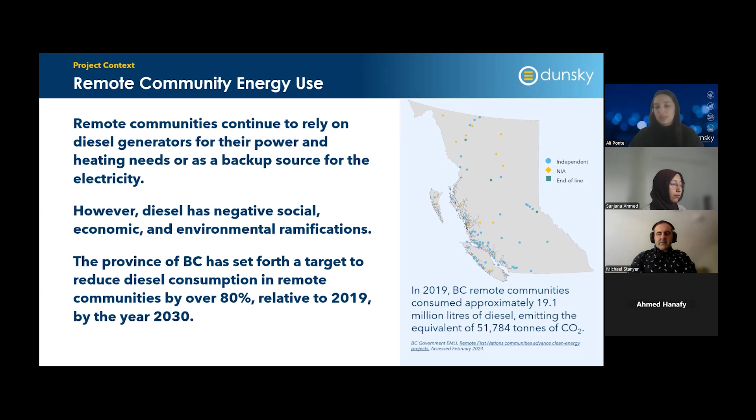Also, a loss of power in remote communities when projects fail in these settings often means that communities lose access to electricity, and consequences can become life-threatening, as many of these communities are isolated in remote environments and experience harsh weather conditions. So naturally, the province of BC has set forth a target to reduce diesel consumption in remote communities by over 80% relative to 2019 by the year 2030.

So renewables in remote communities, generating electricity from renewable sources, has been a key decarbonization pathway in remote communities historically and currently. However, in recent years, hydrogen has emerged as a tool that could contribute to the decarbonization of our global energy systems. Hydrogen is a fuel that can be reliable, scalable, and storable, which makes it attractive to complement the intermittency of renewable energy sources, as well as having potential in some of the harder to electrify sectors such as industry. However, to date, there's been limited exploration of hydrogen in remote communities specifically.

So today, for our scope of work, we'll be covering that this project focused on assessing the potential for hydrogen to serve in the role of a complementary solution to help transition remote communities away from diesel and contribute to more cost-effective emissions reductions.

The goal of our body of work was to summarize the diverse hydrogen production pathways, storage, and transport methods, as well as potential end uses within remote communities; identify a subset of enabling conditions that are required for establishing a hydrogen ecosystem in remote communities, as well as gauging the interest of some remote communities in establishing hydrogen systems; and lastly, examining the potential contribution and cost effectiveness of hydrogen in remote communities through 2 illustrative case studies.

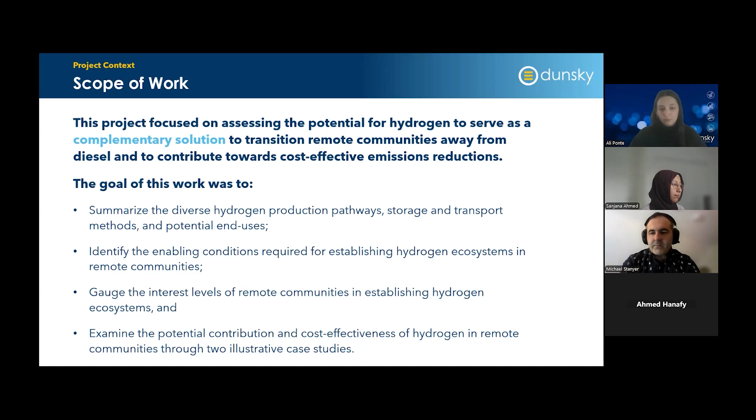So next we'll move on to just a brief hydrogen primer for those that are maybe a little less familiar with hydrogen fuel. So there are several opportunities and challenges associated with hydrogen and its potential role in decarbonizing rural communities. In terms of the opportunities and why we wanted to explore it, hydrogen is scalable. Electrolytic production of hydrogen is a scalable, clean process requiring only water and clean electricity. As renewable energy sources become cheaper and more accessible, the scalability of hydrogen produced from renewable electricity increases. That means hydrogen production can be adjusted to match the fluctuations in energy demand, making it adaptable to different community sizes and needs.

Hydrogen is also versatile. It's a clean fuel that offers optionality in its applications, making it potentially suitable for heating, power, and transportation. Hydrogen is also reliable. Similar to diesel, hydrogen is a physical fuel that can be stored in large quantities as a backup, making it a reliable option for remote communities, particularly those who face unstable power grids and energy supply challenges.

However, there are a number of challenges that are associated with hydrogen. First and foremost, it's nascent. Hydrogen energy systems lack the maturity and widespread adoption seen in more established technologies such as wind and solar. Hydrogen is expensive. The production, storage, and distribution of hydrogen, particularly electrolytic hydrogen, is more expensive than conventional energy sources and some renewable alternatives. Achieving cost parity with these sources will be critical for hydrogen to become a viable option in its widespread adoption. And lastly, infrastructure. Developing the necessary infrastructure requires substantial upfront investment and coordination, including electrolysis facilities, safe storage solutions, and a reliable distribution network.

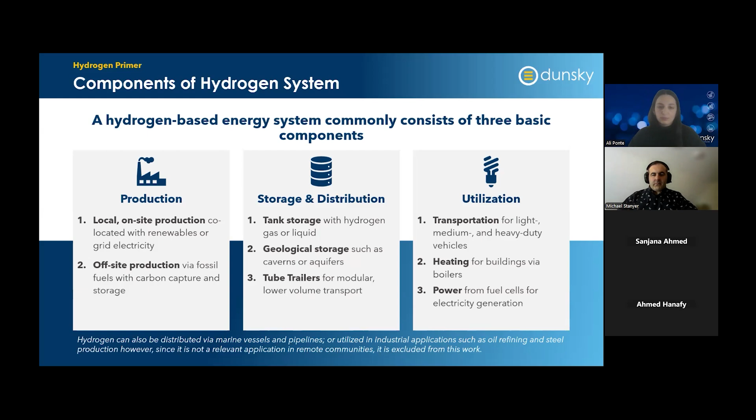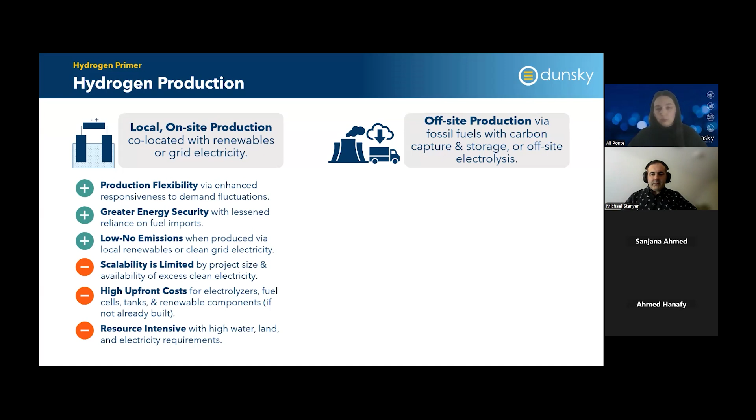So first and foremost, there are two categories of hydrogen production. The first one is on-site. In the context of remote communities, this refers to hydrogen produced via electrolysis, co-located with renewables. This method is highly suitable to remote communities, especially those with access to abundant renewables and limited accessibility, and by that, I mean limited road infrastructure to and from the communities. The decision on which source to use really depends on various factors, such as the availability of renewable energy and grid connectivity or other local conditions.

There are a few positives to local on-site production. There's flexibility, again, being able to respond to demand fluctuations. There is greater energy security, as you're producing the energy locally versus transporting it in from outside of the community, and so you're not as susceptible to supply chain disruptions. Assuming that it is produced from renewables, there's low to no emissions. Scalability is limited; that's one of the challenges with on-site production. So if you have an existing wind project, for example, the scalability of hydrogen produced from that project is limited to the size and availability of wind generation of that project. It's also resource intensive.

Electrolysis requires high water, land, and electricity requirements. Additionally, there are high upfront costs, especially if there is no existing renewable production within the community. There's a need for investment in electrolyzers, fuel cells, tanks, and other renewable components, again, if those don't exist on site. For off-site production, this could be through various pathways from fossil fuels with carbon capture or off-site electrolysis.

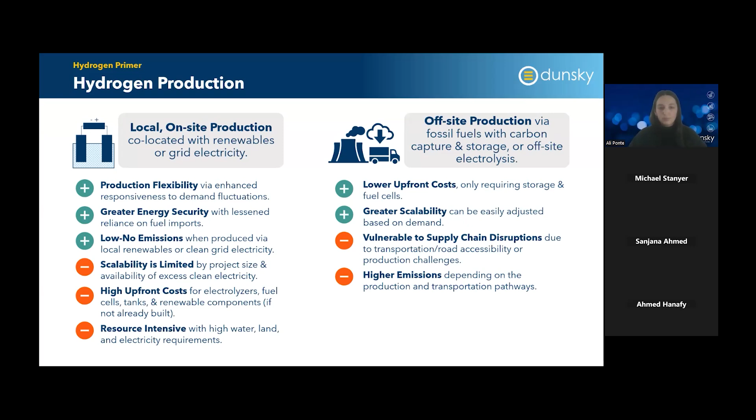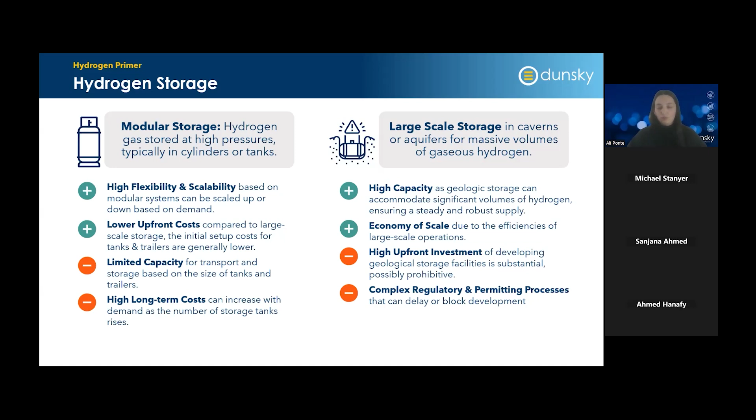For large-scale storage, that can be offered by the availability of geologic storage. So if there are nearby salt caverns, hard rock caverns, or aquifers, this is generally considered safe and economical for massive volumes of gaseous hydrogen. Again, if there is no geologic storage available on or near the community, then this is null. But this is associated with also complex regulatory and permitting processes and a really high upfront investment to develop that geological storage and make sure that it is safe and suitable. However, again, once you reach massive volumes of hydrogen, you can get higher economies of scale.

There are three key end uses for hydrogen: heating, transportation, and power. Heating using hydrogen boilers uses hydrogen gas as a fuel to produce heat for space and hot water applications, very similar to natural gas boilers. There are, however, many challenges with using hydrogen for heating. Firstly, you need a dedicated distribution network to distribute the gas to the boilers. Additionally, existing in-home piping is not suitable for hydrogen as it will leak and rust. And so there are high costs, not only with building out a distribution network, but the cost of retrofitting homes and developing the proper infrastructure that is compatible with hydrogen gas.

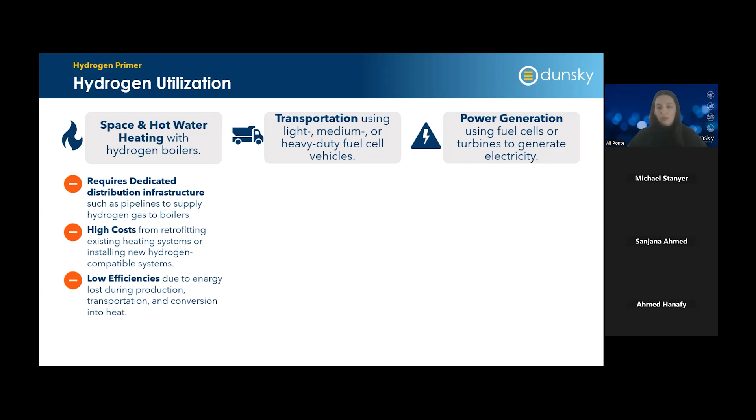While hydrogen boilers offer a low carbon alternative to natural gas boilers, the overall efficiency of hydrogen boilers is lower due to energy loss during production, transportation, and conversion into heat, making heat pumps the most viable option for the communities, as they're more efficient, more cost-effective, and more mature. For this reason, we actually believe that there is no real role for hydrogen in heating in domestic applications, and this is supported by various studies by other authors that examine the role of hydrogen in domestic applications.

Hydrogen can also be used as a fuel for light, medium, and heavy-duty vehicles in the form of fuel cell vehicles. Battery electric vehicles are currently viewed as the primary pathway to light and medium-duty vehicle decarbonization. However, in very small communities, like remote communities with limited grid, unmanaged EV charging can result in peak load growth and the need for large investments in additional grid infrastructure, which is unsustainable. And so fuel cell vehicles potentially could play a role by mitigating some of that unmanaged peak load and complementing the use of electric vehicles.

However, the costs of fuel cell vehicles are significantly higher due to the very high costs associated with vehicle production, fuel cell technology, hydrogen production, and distribution. Fuel cell vehicles also require dedicated refueling infrastructure, similar to traditional gas stations. However, traditional gas stations are not compatible.

For power generation, which is the third opportunity for end use, hydrogen can be used by fuel cells as a clean and efficient way to generate electricity, which makes them more ideal for various applications, including powering remote communities. There are hydrogen gas turbines. However, they're very large, less scalable, and currently limited to about 10% hydrogen to 90% natural gas. And while they are projected to have that ratio be higher, they are not proven for that yet, and so they're not technologically mature.

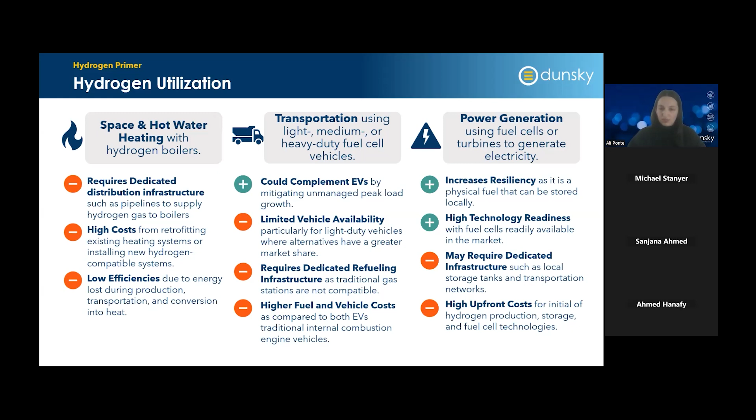Now we will move on to evaluating hydrogen feasibility. So we've developed a 3-step framework for assessing the feasibility of hydrogen within these communities. The first one is to assess the enabling conditions of the community. The second step is to define the hydrogen system. So once you have a better understanding of the characteristics that exist within a specific remote community, you can then look at the different hydrogen pathways and define what are the potential pathways for building out hydrogen and implementing it

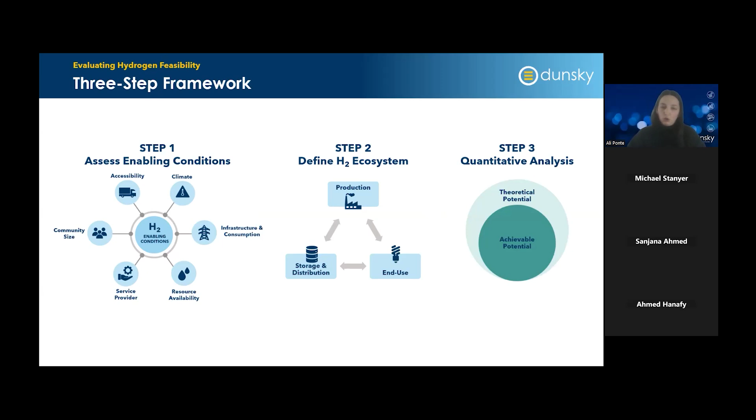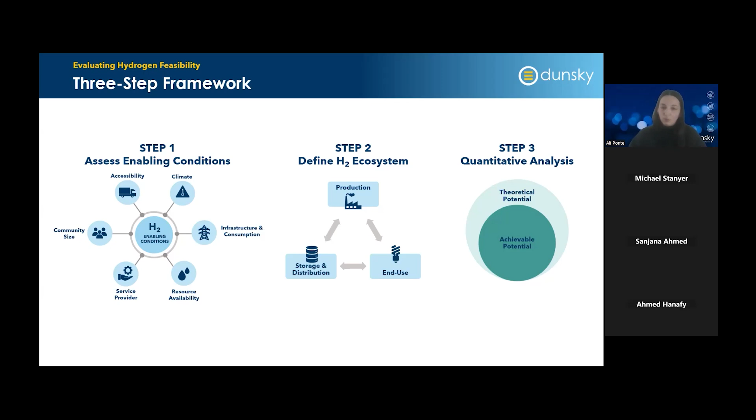within the community. And the third step would be to conduct an actual quantitative analysis using community-specific data, consumption values, and load characteristics to then get the achievable potential for that specific community. This would offer insights into the technical, financial feasibility of specific hydrogen pathways and validate or disprove your theoretical role of hydrogen that you came up with after step 1 and step 2.

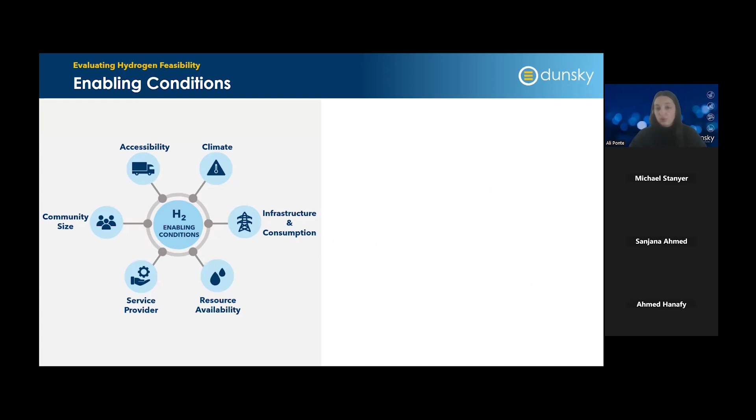So moving on to some of the enabling conditions, remote communities are characterized by a set of enabling conditions, and these conditions influence the community level ability to support the development and integration of all new energy systems. So the first one being accessibility and road access. So the lack of adequate year-round road access can create challenges in implementing hydrogen systems. It can delay the deployment of personnel, making it harder to overcome certain operational challenges if there are no employees within the community who are capable.

BC remote communities are located in different climate zones throughout the entire province, ranging from mild to Arctic. And infrastructure within these communities must be built to withstand the challenges of each climate zone, especially those in remote or harsh climates. And for example, fuel cells and electrolyzers run at high temperatures. And so additional infrastructure may be needed to house those in colder climates to ensure that they are running at optimal operating temperatures.

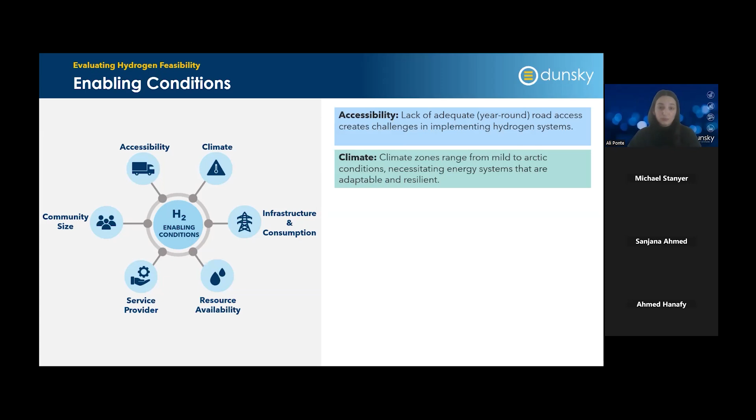In terms of infrastructure and consumption, communities may rely entirely on diesel or a mix of diesel and, in the case of end-of-line communities, some transmission. And so hydrogen's scalability and decarbonization potential hinges on the emissions reduction potential and level of diesel dependency within these communities. As I alluded to earlier, the ability to generate electricity on site is fundamental for producing hydrogen locally. And so limited freshwater resources can restrict the selection and viability of electrolyzer technologies, making things like freshwater access a pivotal factor in the deployment of hydrogen production systems. Additionally, renewable resources such as wind and solar for the viability of developing local renewable energy systems.

Remote communities in BC have a variety of different service providers. Some of their grids are managed by BC Hydro, and some of them are independently owned and operated. And the type of service provider, particularly in the context of independent power providers and utilities, affects the distribution of responsibilities for safety, reliability, and operational management of these energy systems. And so the viability of hydrogen really depends on who's owning and operating these systems and their capacity and willingness to operate and maintain these systems.

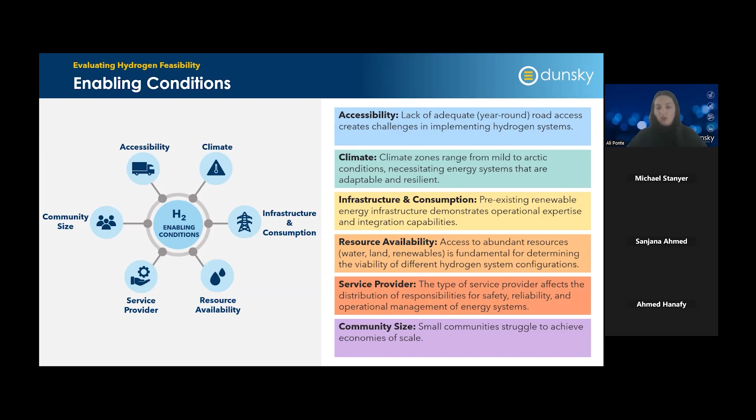The next step, again, would be to define the hydrogen ecosystem. So once you have a better understanding of the conditions which exist within the remote community that you're exploring the potential for hydrogen for, you examine those enabling conditions, and then you evaluate the various production, storage, and distribution pathways and their ability to meet that community's specific needs and use cases. Once you've identified the different pathways, you would then begin to identify the specific technologies and components that are required to support the specific hydrogen pathways.

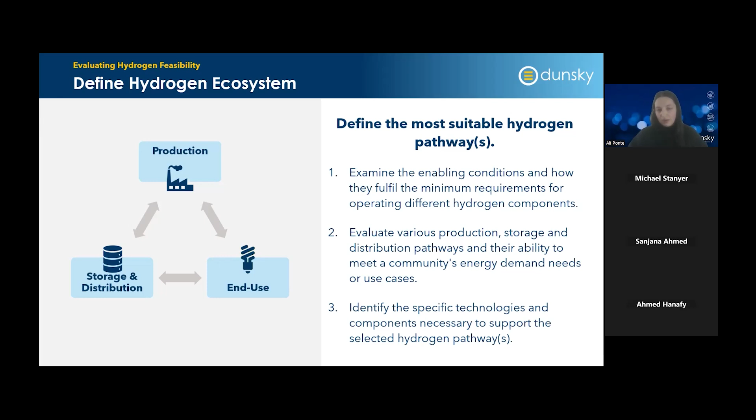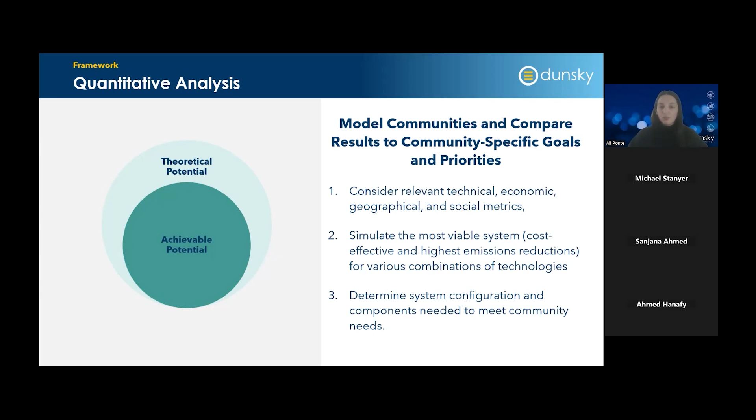And lastly, from there, you would do a quantitative analysis to model the communities and compare the results of the quantitative analysis to the community-specific goals and priorities. So you would consider the relevant technical, economic, geographical, and social metrics. You would then take all of these things into consideration with community-specific data and simulate the most viable system. That could mean the most cost-effective, highest emissions reductions, or other community priorities for various combinations of different technologies, and determine which system configuration, if any, and components needed meet those community needs.

In terms of the key findings for some of our illustrative case studies, so first, just to set the stage, what we did here is we did two illustrative case studies, techno-economic assessments, to assess the feasibility of hydrogen.

One, for a 100% diesel-dependent remote community, the role of hydrogen in this community was for renewable balancing, where a renewable energy system was developed as the primary source of power within the community. And when renewable generation exceeded community demand, the excess electricity would be utilized to produce hydrogen that is stored in tanks on site and later utilized either to meet peak demand or when renewable generation was lower than demand.

The second case study was for a grid-connected end-of-line community that has an average of 5 days of outage per month. We assume that their normal baseline for these outages is to use 100% of the load from diesel generators. In this case study, hydrogen is modeled strictly as a backup resource to meet the needs of the community during the outage events. And during normal grid operations, excess electricity from the grid is used to produce and store hydrogen locally to replenish the hydrogen supply between outage events.

The case studies in these communities broadly reflect conditions and characteristics observed in various remote communities within BC, however, are not specific to any one community. For these case studies, we used HOMER modeling software to simulate different energy sources, including renewables, grid power, and storage, to explore various energy system configurations with the goal of identifying the most cost-effective pathways to achieving emissions reductions within each case study.

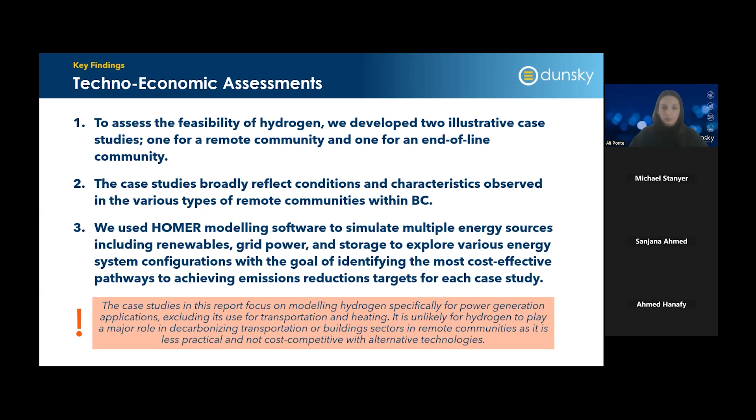So for the first case study, modeling a 100% diesel-dependent community, renewable energy plus battery storage offers the most cost-effective pathway to achieving that 80% decarbonization goal in power applications. Achieving this target from renewables has a lower cost than the baseline diesel system, primarily due to the substantial reduction in diesel fuel costs.

When we consider a hydrogen plus renewable scenario, it could potentially represent an alternative cost-competitive solution to meeting the same target. However, hydrogen's feasibility and applicability largely relies on government subsidies and alignment with community priorities. And when I refer to subsidies, we assume that in both case studies, a 40% discount is applied to the cost of hydrogen technology, and this is associated with the federal Clean Hydrogen Investment Tax Credit.

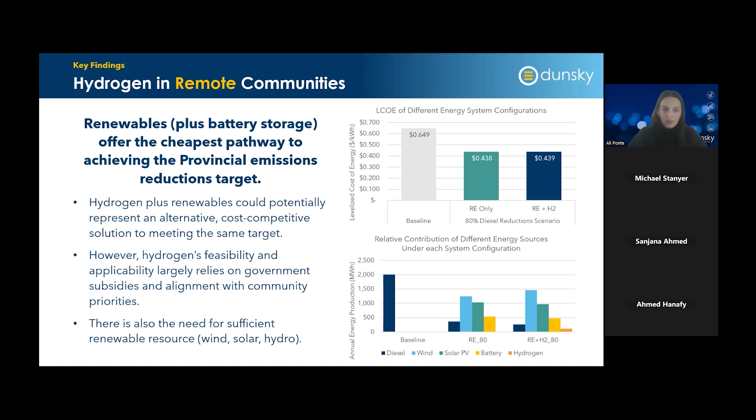Of note, for the renewables plus hydrogen scenario, hydrogen only contributes to about 5% of the community's electricity needs, indicating that it only becomes cost effective when renewable generation cannot meet peak demand. And so really the decision between these two options in achieving that 80% decarbonization target, solely with renewables or renewables plus hydrogen, should be determined by community-specific goals and considerations, assuming these conditions are correct. There is also a need for a sufficient renewable resource, for example, some combination of wind, solar, or hydro.

In the same context of this 100% diesel-dependent remote community, we also considered a 100% emissions reduction scenario beyond the provincial goal of achieving 80%. Achieving 100% emissions reduction solely with renewables and energy storage actually requires significant overbuild of wind, solar, and batteries just to satisfy those peak demand requirements and maintain system reliability without diesel. As compared to the 80% reduction scenario, this exact same community needs double the wind and solar capacity and 5 times the storage capacity to achieve system-wide reliability. This leads to considerable capital expenditure and levelized costs that are greater than the existing diesel generating system.

Alternatively, if you look at the inclusion of renewables and hydrogen, hydrogen reduces the need for overbuilding renewable capacity, providing a more balanced and economically feasible approach to full decarbonization while also still maintaining reliability. However, it's worth noting that hydrogen production is not actually increased significantly within this scenario as compared to the 80% scenario, still meeting only approximately 5% of the annual electricity consumption.

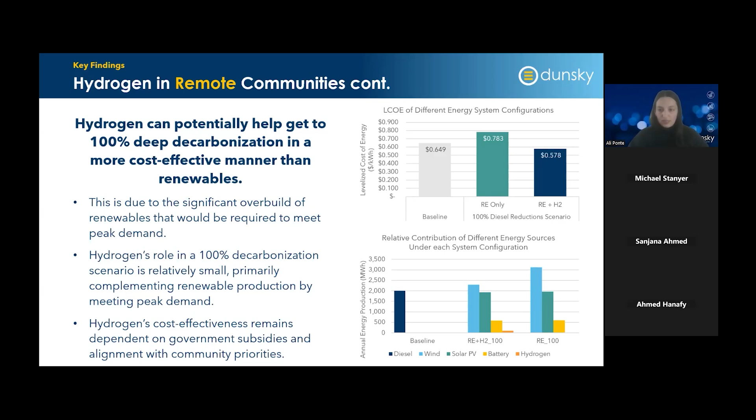For the second case study, we modeled that end-of-line community with monthly outage events, which are 5 days in length. Looking at solely a renewables plus energy storage only system sized to meet that unmet load during outages, it requires a significant overbuild of resources to meet peak demand. This requires a significant upfront capital investment and results in an extremely high levelized cost of energy.

Alternatively, meeting the entire outage load of the community using hydrogen generated from excess grid electricity or hydrogen produced offsite, then transported and stored locally, both cost more than the baseline, but are significantly less than the renewable only scenario. From an economic perspective, both hydrogen options represent cost increases from the baseline. However, from a decarbonization lens, hydrogen represents a potentially viable opportunity to achieve 100% emissions reductions when you compare it to a renewables plus storage only scenario.

When comparing the two hydrogen scenarios, the main economic advantage of local production stems from avoiding the cost of transporting hydrogen to the community from an offsite facility, which really accounts for about 1/3 of the costs in that scenario. Ultimately, decarbonizing the backup diesel systems in these communities represents a cost increase as they must be sized to meet the full load for a multi-day outage, but really they only represent less than 20% of the annual community consumption, where the remaining 80-ish% is met by normal grid operations.

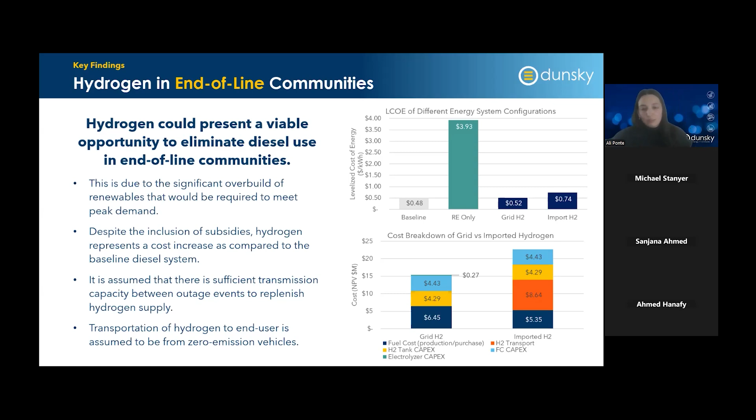And just a note, for these scenarios, we assume that the hydrogen generated offsite is produced from clean electricity and transported using non-emitting vehicles, and that would achieve near 100% emissions reductions. However, that would need to be proven in a community-specific study. And so the total emissions reductions may vary in future studies.

So looking ahead, what does this mean going forward? The long-term viability of using hydrogen in remote community decarbonization remains uncertain. In our body of work, its economic feasibility hinges on the hydrogen investment tax credit, which we assume projects will be eligible for the highest tier, covering 40% of hydrogen technology costs. However, that's not necessarily verified and needs to, again, be verified through a community-specific assessment.

The success of these projects will depend also on overcoming other barriers, including financial, technical, and logistical challenges, as well as aligning with community priorities. Some communities may not be interested in hydrogen, and so that might prevent a project from moving forward. Additionally, each remote community is unique, and therefore decarbonization requires a bespoke approach and should be precisely tailored to meet the specific needs of each community.

And so while these two case studies demonstrate the potential role that hydrogen could play in these two types of communities, again, they're not entirely applicable to specific remote communities, and so these results need to be validated with community-specific data. So communities interested in exploring hydrogen should first and foremost evaluate local interest within the community, raise awareness, conduct engagements, and build support and capacity within the community to potentially explore, own and or operate hydrogen projects within the community.

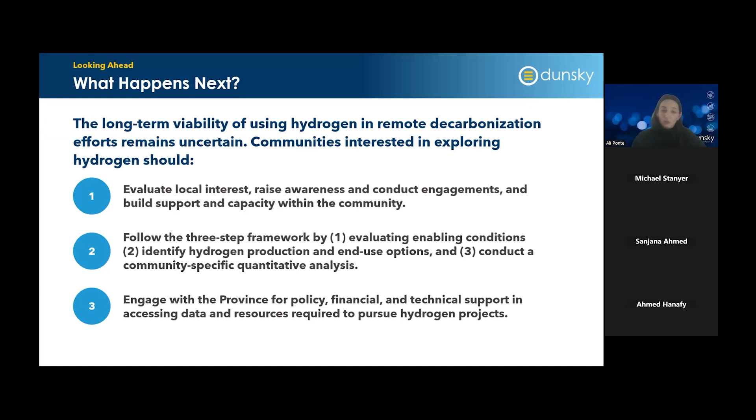And lastly, these communities should reach out to the province or BC Hydro, if these are BC Hydro communities, for policy, financial, and or technical support, especially in accessing the data and resources required to pursue hydrogen projects. So that's the end of the presentation, but I am happy to stay on and answer any further questions.

I had just a question, not to go into too much detail, but I'm curious about the LCOE of the diesel currently, and I've seen various studies about northern communities and very high LCOEs there. Like, what's the sort of typical diesel price that's assumed there, and can diesel transportation costs be significant as part of that today for these remote communities?

Yeah, Sanjana, I know you have knowledge of the diesel price that we used for the studies. Diesel transportation costs for sure can be significant, as well as one thing that we didn't factor into the study, which was refurbishment or replacement of diesel generating systems, which could also add significant costs to the case studies and increase the levelized cost of just the baseline diesel operating system.

Presumably, the cost of transporting diesel to the communities is built into the costs that they're paying for diesel, that heavily subsidized cost. Unfortunately, also, this study is not reflective of the true cost of diesel, which would then factor in subsidies, which are extremely hard to track as they are coming from multiple sources.